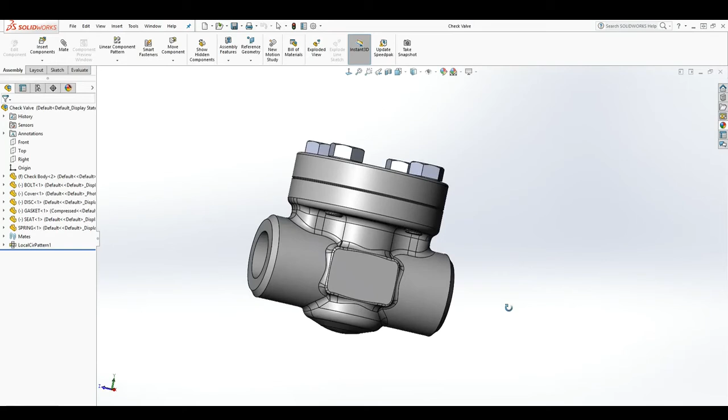So to start, let's just open the valve. I'll browse to my file location and open my check valve. And so now I have the check valve, and some of those valve components that I provided in the asset folder might already have materials attached to it.

So let's click on this display manager for the material, and I'm just going to click this, hold control, click the last one, and delete. So if you have any material in your parts already, delete everything so there is nothing in it. Everything should be the same color.

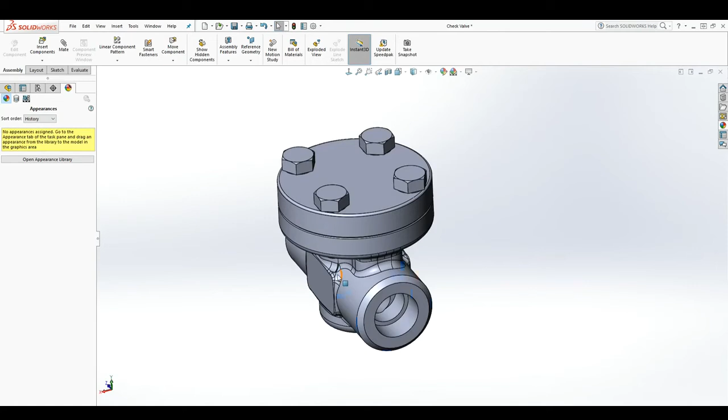Now we are going to add appearance to it. The way we add appearance is we click on this appearance on the right side, pull this down, click on the arrow drop down, and you have the different appearances here: plastic, metal, paint, rubber, and so on.

Since our valve is metal, we're going to click the drop down for metal, and you have the different types: steel, chrome, aluminum, bronze, brass, and so on. For our valve cover and valve body, that is going to be carbon steel. So we click on the steel folder and look for the carbon steel. We have the cast carbon steel here.

Once you find the right appearance, click and hold, and drag it to the body. Now you have different options: add it to the body, the extrude boss, that face, or the part itself. We want to add it to the part - the difference between the check body and the assembly is when I add it under the assembly, it only applies there, not to the part. So we click the check body, adding it in both the assembly and the part itself. Now we can see that appearance is applied.

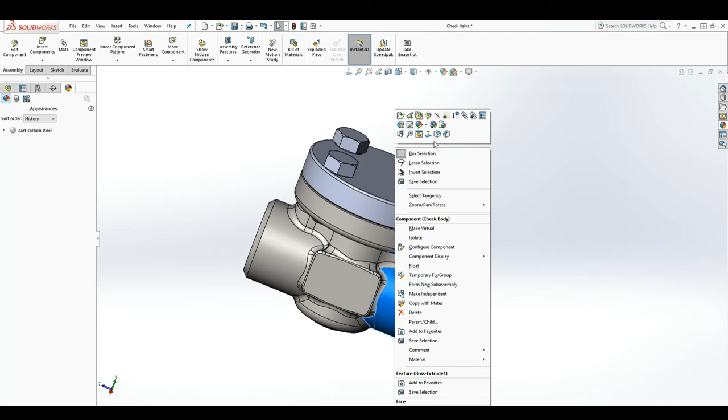Since this appearance is the same, the cover is going to be the same appearance as that body. What we can do is right click on this appearance, and up here you see copy appearance. We copy and right click on this body, select paste appearance, and apply to the cover. Those are the ways you apply it, or you can drag this to that instead of copying.

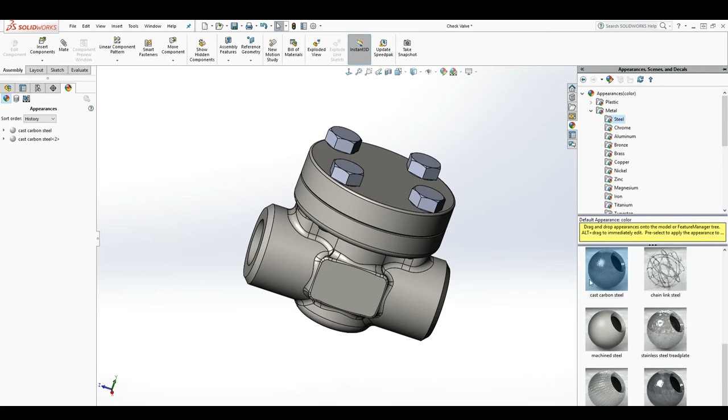For the bolt it's going to be cast iron. We'll go under metal, select iron, and we have cast iron over there, and drag it to that bolt. Since all of our bolts are the same, it recognizes it, so we're just going to paste it.

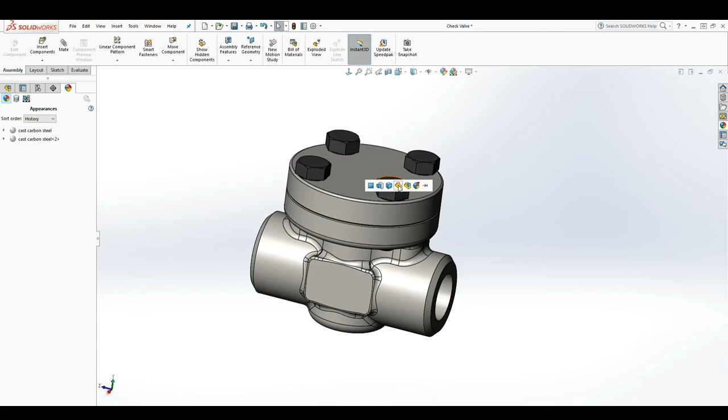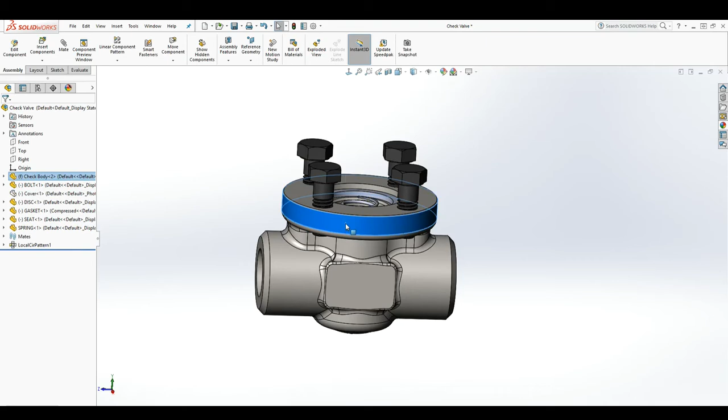The next thing we need to do is the internal parts. Instead of sectioning, we can temporarily right click on this and hide it. So we right click and hide, revealing what is inside. You can tell those parts are hidden because now it's white instead of yellow.

Now the gasket is a chromium plate. We're going to go to chrome, find the chromium plate, and drag it to the gasket, making sure you select the gasket.

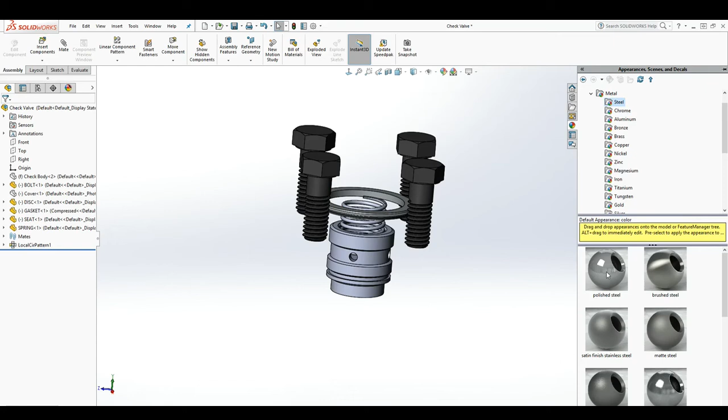The spring is going to be polished steel. We go under steel, find the polished steel, and drag it to the spring, making sure to select the spring.

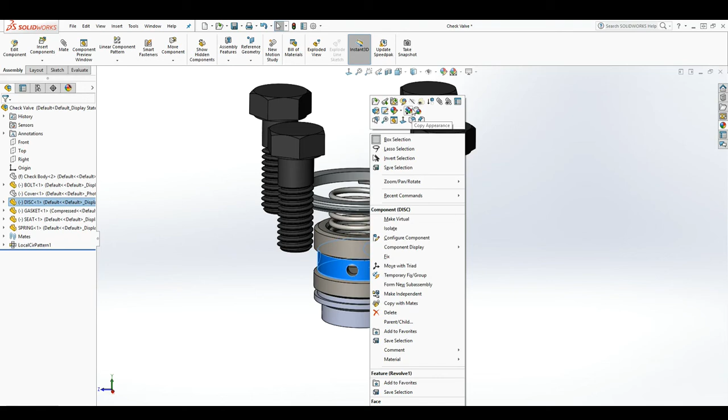The last two we want to do: the disc is going to be machine steel. We scroll down, find the machine steel, and drag it to the disc. We can right click, copy that appearance, click on the seat, right click, paste - making sure when you paste it you select the seat, right click, paste.

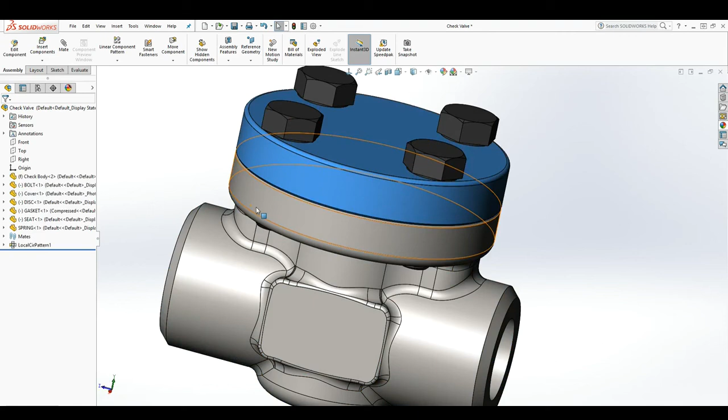Now we've applied the appearance to all of our parts, and what we can do is show our components again, and that is pretty much how you apply appearance to your part.

Another way to do it, actually the easiest way in the assembly, is you can right click, open the part itself, and apply the appearance in the part, and everything will update in the assembly.